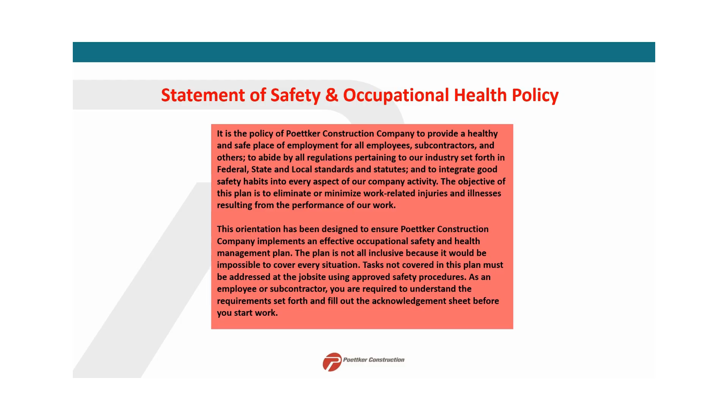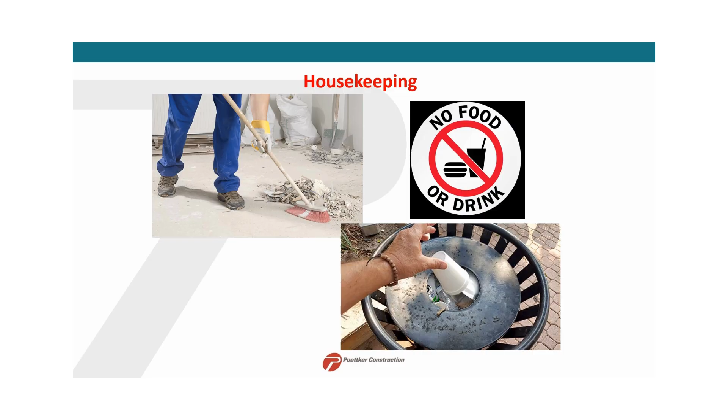Housekeeping. Clean up work areas daily. Place trash and debris in proper receptacles. Having a clean job site can help mitigate slips, trips, and falls. Everyone is responsible for their own cleanup. Food and drink shall only be consumed in designated break areas and trash thrown away properly. Only water is allowed outside of break areas.

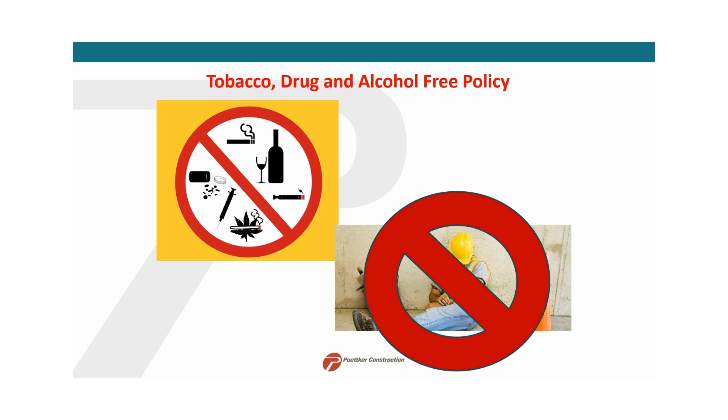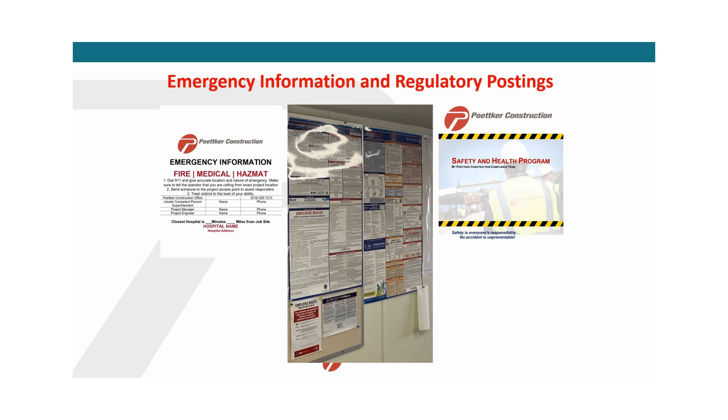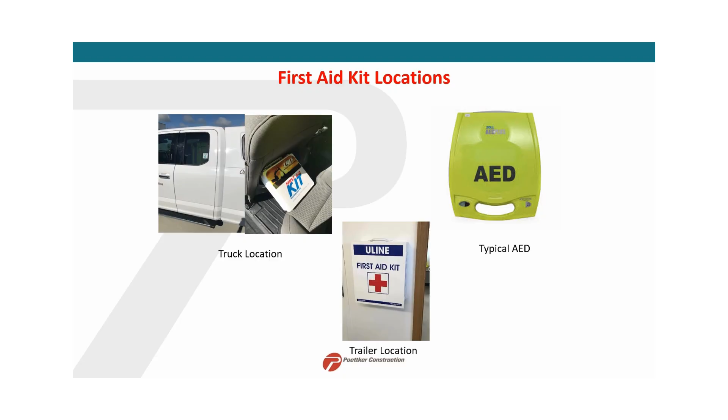First aid kit locations. At the very minimum, a small first aid kit is located in each Poettker Construction truck. Projects with job trailers will have a kit located in the trailer. Given the location of a project, an AED, automated external defibrillator, may be available. Poettker Construction strives to have all their supervisors first aid CPR trained. However, all kits and AEDs have easy to follow instructions when administering help.

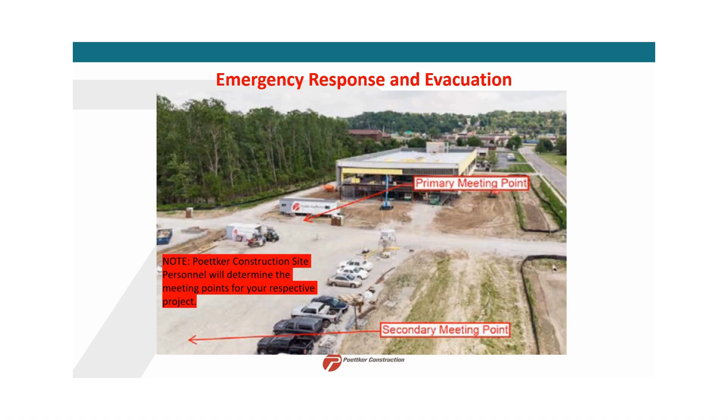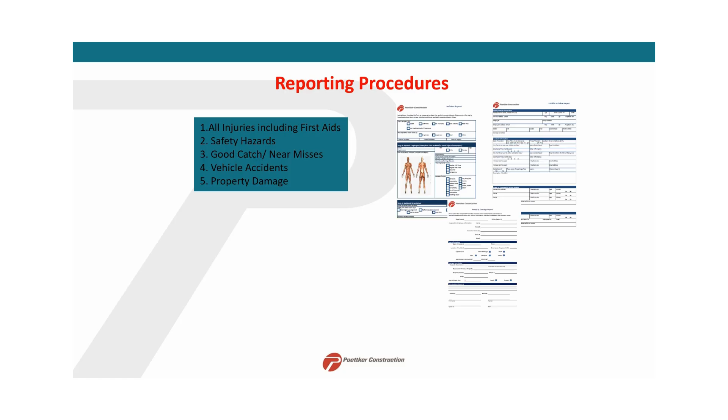Reporting procedures. All injuries including first aids, good catches, near misses, vehicle accidents, and property damage must be reported immediately to your supervisor. This allows us to investigate, identify trends, and determine root cause. It is Poettker Construction's expectation that everyone cooperates with designated investigators when an incident investigation is being conducted.

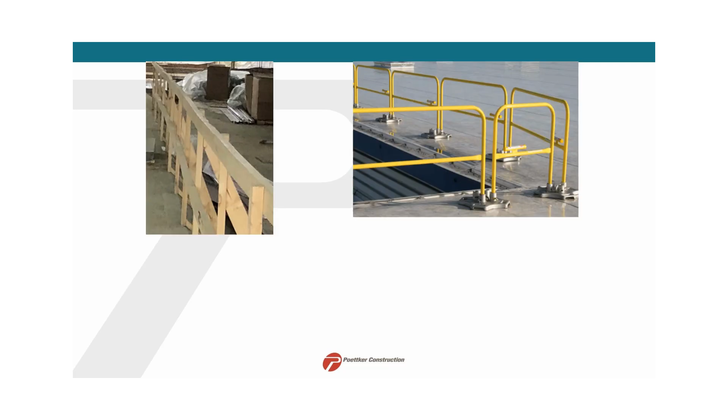When elimination is not possible, guardrails are the most common installation. Guardrails must be installed with the top rail at 42 inches plus or minus 3 inches, rated to withstand 200 pounds of pressure both down and outward. A mid-rail at 21 inches and toe boards installed if there is potential for workers to be struck by falling objects below.

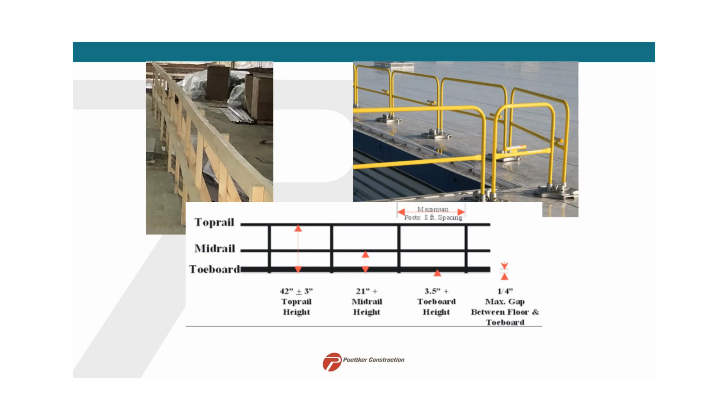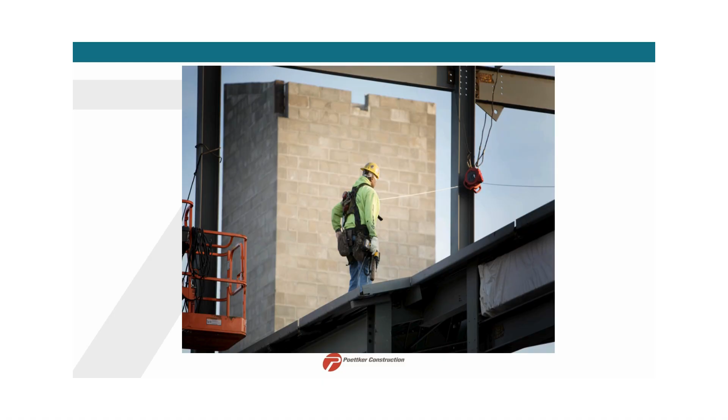The next most common fall prevention control is the use of a personal fall arrest system. These are comprised of a rated anchorage point, connecting device, either a lanyard or self-retracting lanyard, and a full body harness equipped with trauma straps to assist in self-rescue.

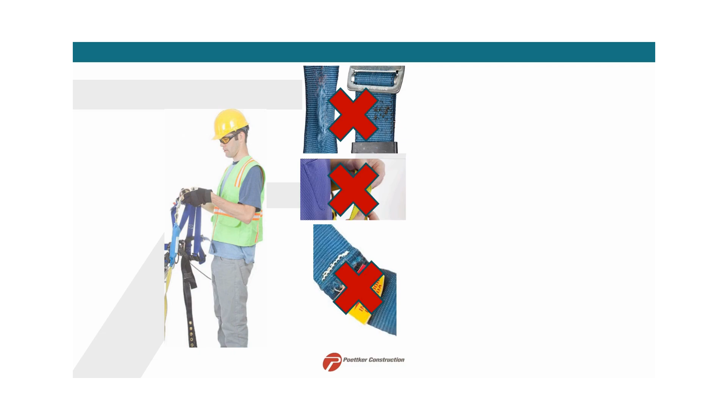Personal fall protection equipment must be inspected before use, and damaged or defective items shall be taken out of service immediately. Fall protection equipment shall also be sized for each employee and worn correctly, used in the application for which it was designed. Employees must be trained on the equipment they are assigned. If you have any questions regarding this policy, please contact your supervisor.

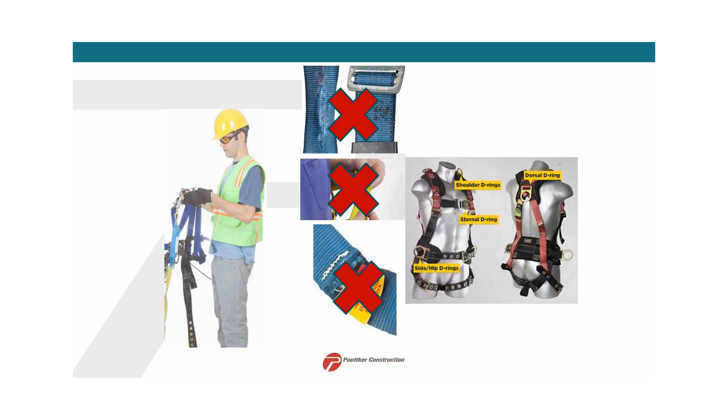Ladders, scaffolds, and lifts.

Ladders must be inspected before use. Look for damaged rungs, missing tags, bent or overflexed arms, cracks, or other damage. If any of these defects are found, the ladder shall be taken out of service immediately.

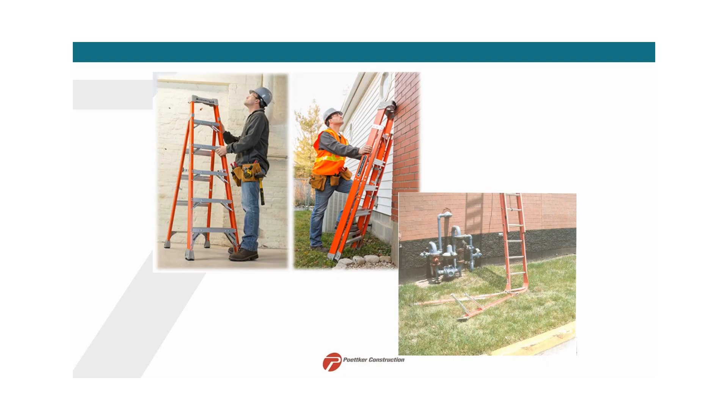Use ladders for their intended use and never lean a step ladder unless it's specifically designed to do so. Maintain 3 points of contact at all times while ascending and descending from the working level. Keep your belt buckle positioned between the rails while on the ladder. Hoist materials using a rope and never carry anything while climbing.

Never stand on the top rung. This could cause you to fall, resulting in injury or death.

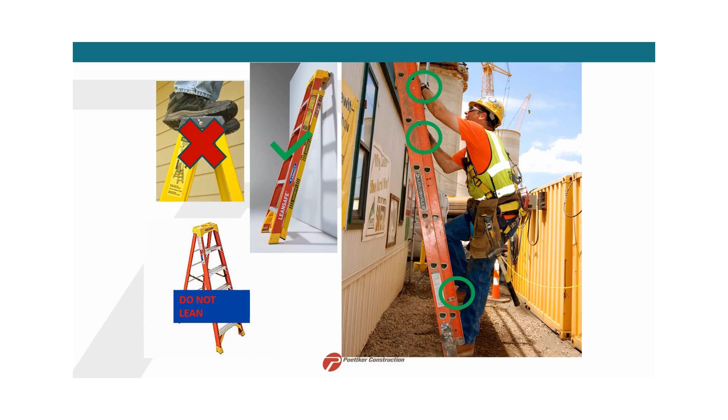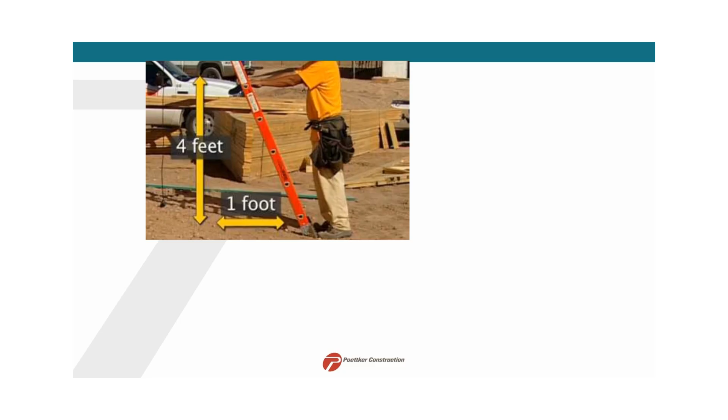Extension ladders shall be installed using a 4-to-1 slope, meaning for every 4 foot in elevation, the base is extended outward 1 foot. Extension ladders must extend 3 foot above the working surface and shall be secured at both the top and bottom.

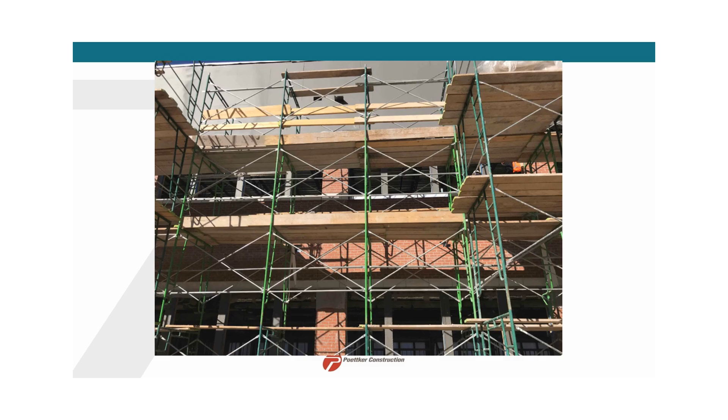Scaffolding must be installed and dismantled under the supervision of a competent person. Scaffolds shall have base plates and mud sills installed, properly sized and of appropriate materials. Working surfaces must be fully planked, and workers will never be permitted to climb on bracing. Designated access points with ladders must be determined.

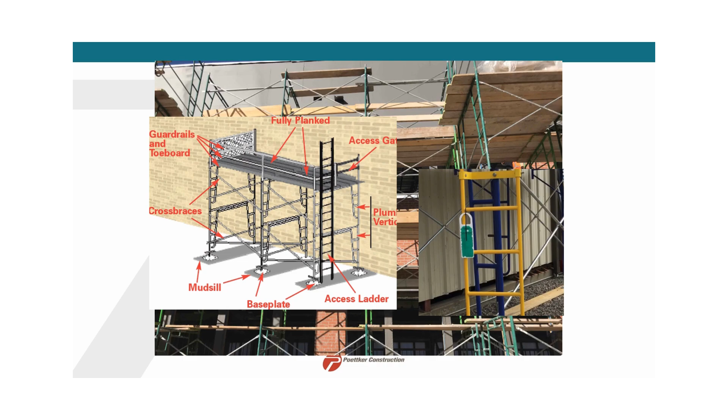Personal fall arrest systems or guardrails shall be utilized anytime scaffolds are over 6 foot in height. In addition, inspections shall be done by the competent person and tagged appropriately prior to anyone accessing the scaffold.

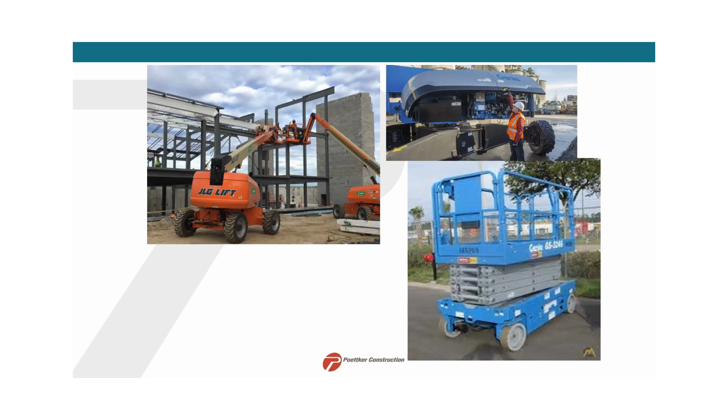Articulating boom lifts and scissor lifts help us get personnel to elevated working areas and are common pieces of equipment on our job sites. Operators must be trained on the equipment they are using. Equipment must be inspected before use, and equipment found inadequate taken out of service immediately. Personal fall protection with appropriately sized SRL or lanyard must be utilized at all times when operating these types of equipment.

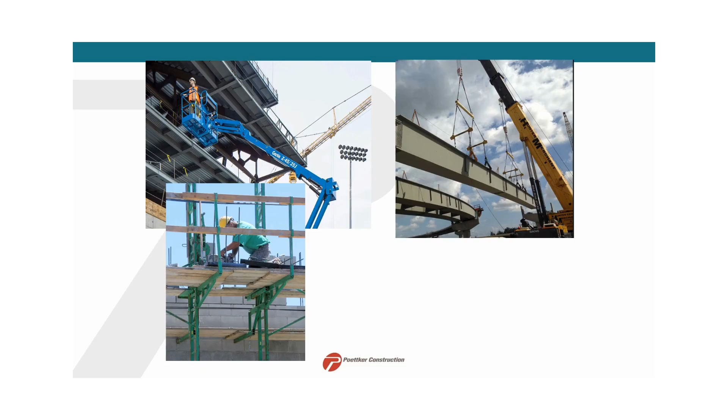Overhead work greatly increases the potential of falling objects striking a person below. Tasks include, but are not limited to, working off man lifts, steel erection, masonry work off scaffolding, and roofing work. We have controls we can put in place to protect those workers down below from being struck by objects.

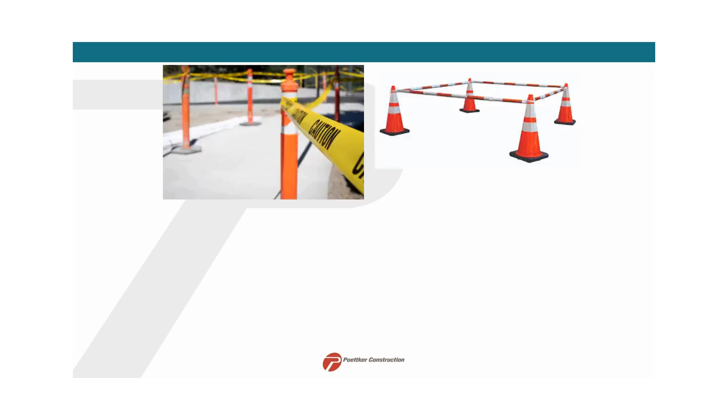These controls include restricting access to the work area. This would include flagging and barricading off the area in question, posting signage warning others of the potential hazards above, tethering tools, equipment, and materials, and utilizing spotters and monitors so that individuals do not inadvertently walk into the area.

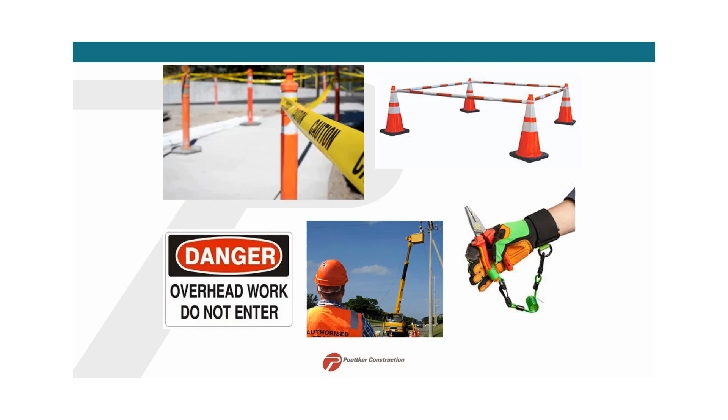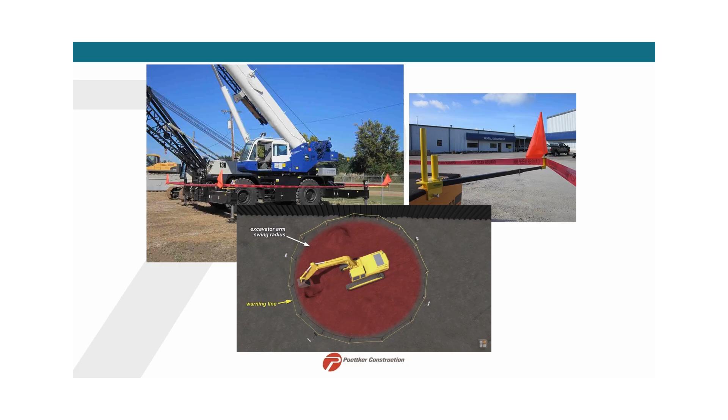At no time is it acceptable for employees to work under suspended loads, regardless if the employee is authorized to be in the work area or not. Swing radiuses for equipment that can pivot on a center pin shall be flagged off or barricaded. Doing this will help eliminate the potential of a struck-by or caught-between incident.

Excavation and trenching.

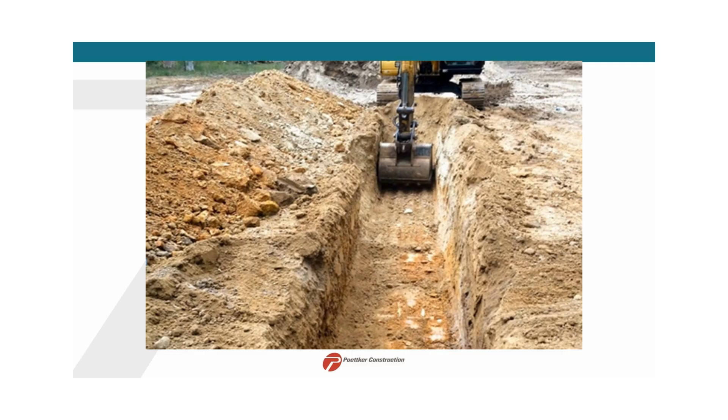Excavation and trenching work shall be done under the direct supervision of a competent person. This person should have an understanding of the work, be able to identify hazards, and provide corrective action.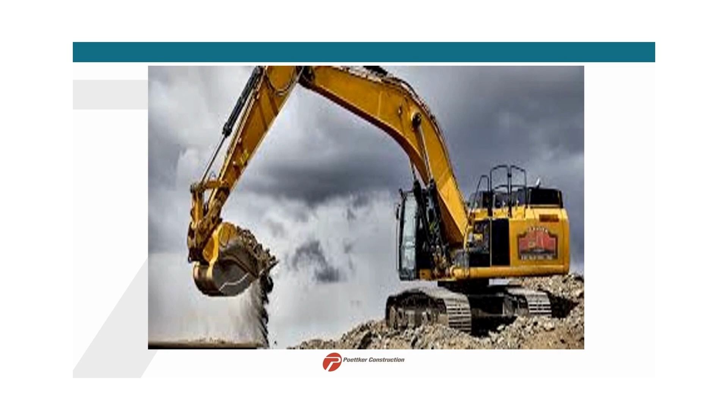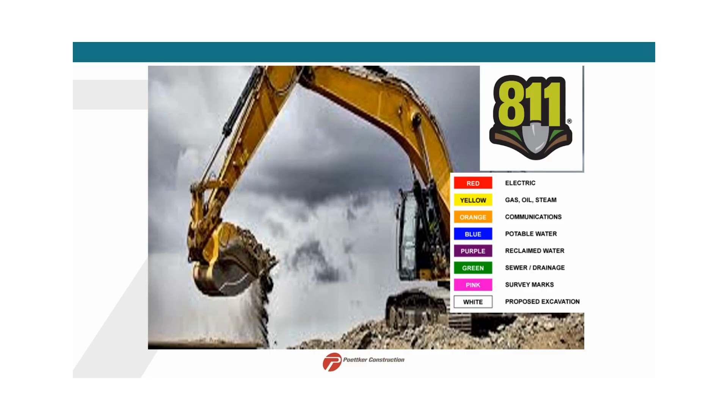Each contractor performing ground penetrating activities shall obtain a dig number by utilizing either 811 or other states' respective one-call systems. The allotted time must be observed for utility companies to complete their locates. Using another contractor's dig number is never allowed and against the law.

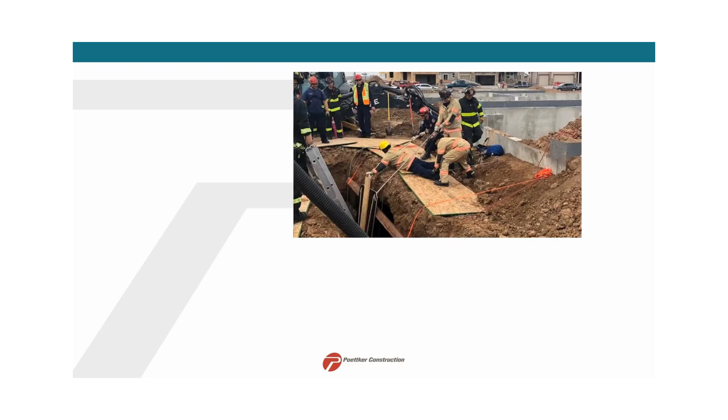Excavations and trenches have the capacity to be some of the most dangerous areas of our job sites. Hazards can range from cave-ins to oxygen-deficient environments. It is important that we take precautions and identify potential hazards before commencing excavating and trenching activities.

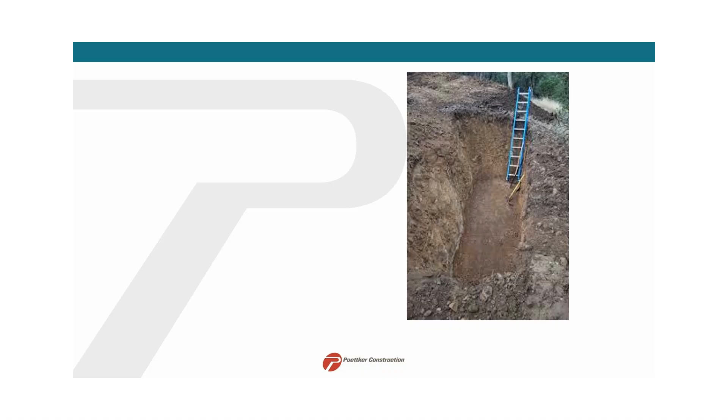All excavations and trenches 4 foot or more in depth require either ladders, stairways, or ramps installed at 50-foot intervals. This is so a person in the trench or excavation never has to travel more than 25 foot to exit the space.

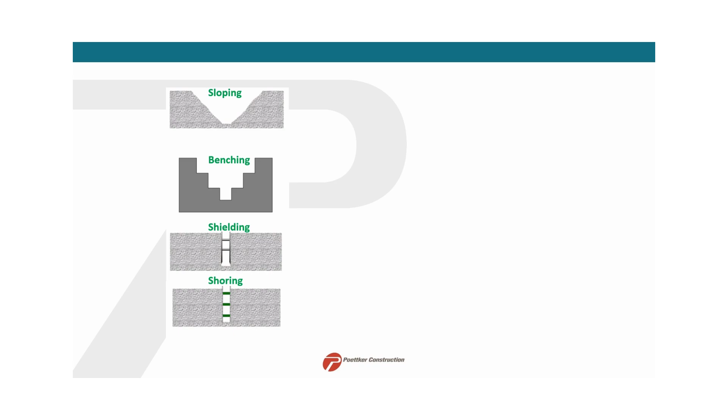All excavations and trenches greater than 5 foot but less than 20 foot will require one of the following: sloping, benching, shielding, or shoring in order to protect workers working within. The competent person must know the soil type in order to make the selection and make the excavation safe.

Confined spaces. Confined spaces are never to be entered unless you are authorized to do so. Confined space entry will require a written plan, testing, and permitting determination prior to the employee's admittance. Please contact your supervisor should your work require confined space entry.

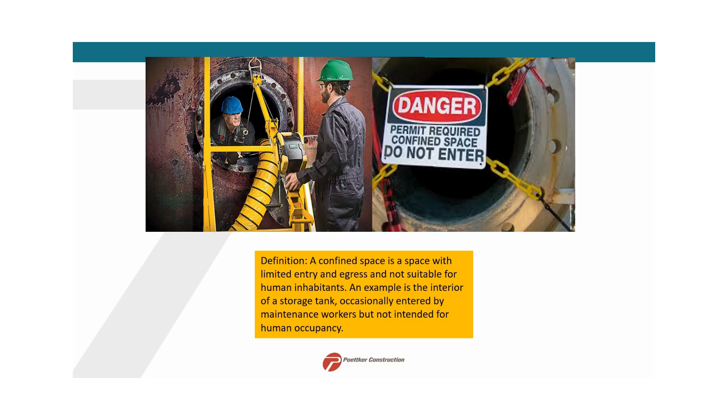Electrical. Only licensed electricians are authorized to work on electrical equipment. When working on or near equipment, power sources shall be de-energized and made safe. Lockout tagout shall also be implemented to protect and avoid accidental energizing of circuits.

At no point in time is an unauthorized worker to enter an electrical room and power back on breakers. If a breaker is flipped off, it could indicate a problem or someone could be on the other end and result in electrocution or shock. If you need assistance, please contact the site electrician.

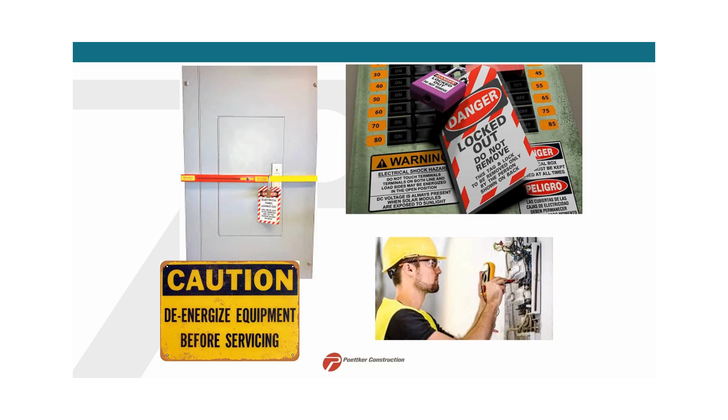We utilize electricity every day on our job sites to complete our work through the use of extension cords, lighting, and power tools.

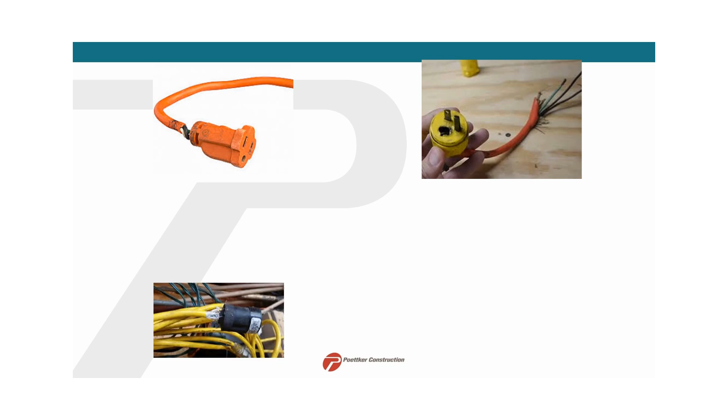Cords shall be inspected and free of damage. Be sure to check the cord fully and pay special attention to the area around the plug. Tape is never an acceptable repair for cords. Cords found to be damaged shall be taken out of service immediately.

Temporary lighting shall also be inspected. A minimum of 5-foot candles shall be provided to each work area. Lighting shall also be on its own dedicated circuit, protective cages closed, and missing or burnt out bulbs replaced.

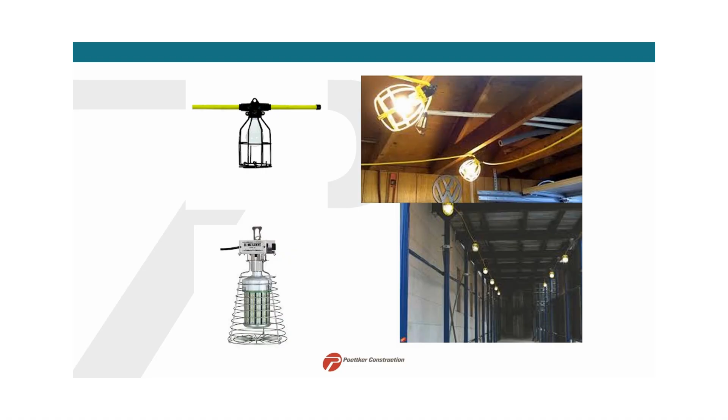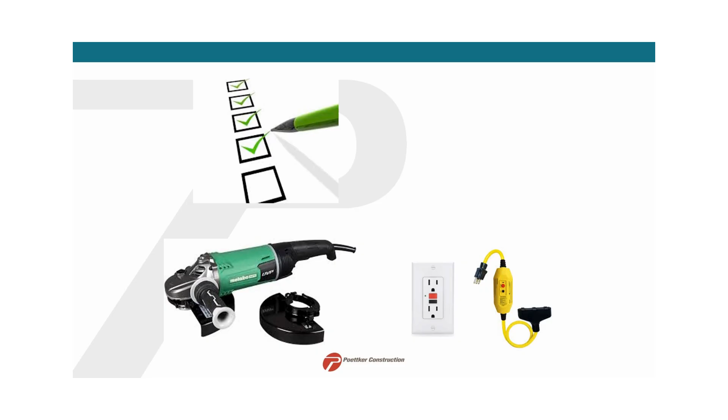Power tools shall be inspected before use. Guards and safety devices shall remain in place. Tools shall always be plugged into an approved GFCI. Cords shall be in good condition and double insulated. Tools shall never be modified unless written consent is obtained from the manufacturer, and tools found to be damaged must be taken out of service immediately.

Overhead utilities. Overhead electrical lines are all around us, and far too often workers and equipment come in contact with these installations. All workers and equipment operating near these lines shall maintain a clearance distance of at least 20 foot for voltages 50 kV and above. Cover-up protection, signage, and elevated warning lines should also be utilized.

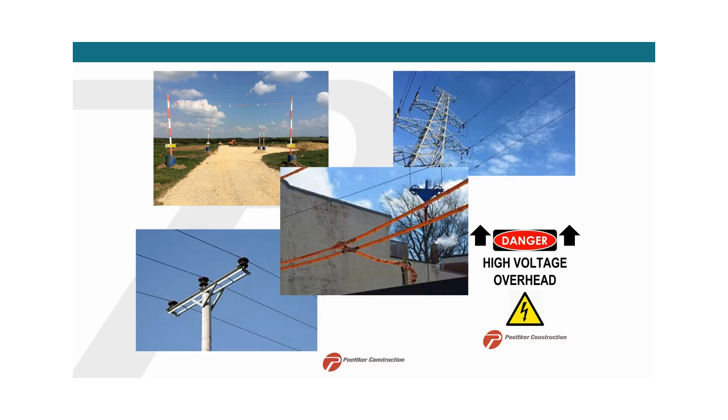Hot work. Hot work is any work that has the potential to produce a spark or open flame. This includes but is not limited to welding, cutting, grinding, brazing, and torching.

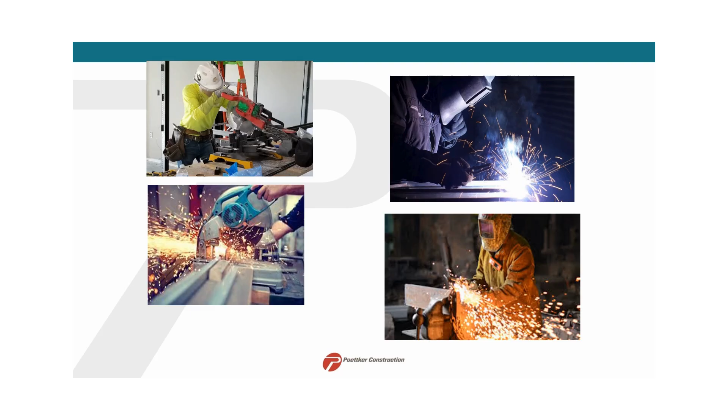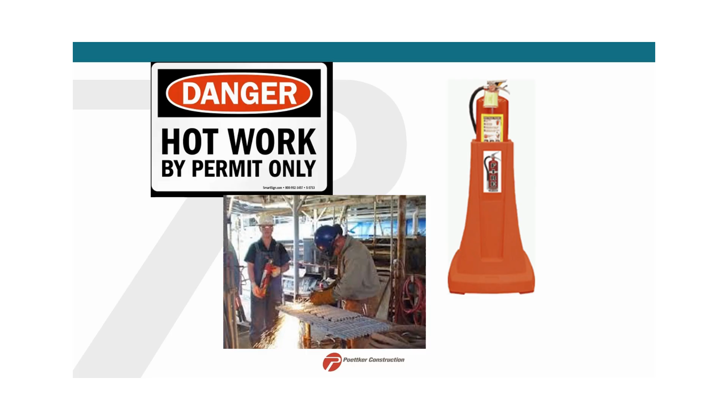Hot work also requires the use of additional personal protective equipment. A welding hood or face shield with safety glasses will be required when performing this work. Permits and fire watch with fire extinguishers must be utilized when performing hot work. Fire extinguishers are available on site and are in the back of every Poettker Construction superintendent truck. Please check with your supervisor on site-specific requirements when performing hot work.

Employee conduct. Workers are expected to conduct themselves in a professional manner at all times. This includes wearing proper attire, exhibiting good hygiene, displaying good behavior, avoiding and not participating in theft, vandalism, fighting, horseplay, aggressive behavior or language, sexual harassment, and discrimination of any protected class.

Any violation of this policy will not be tolerated. Report any concerns to your supervisor so disciplinary action can be taken.

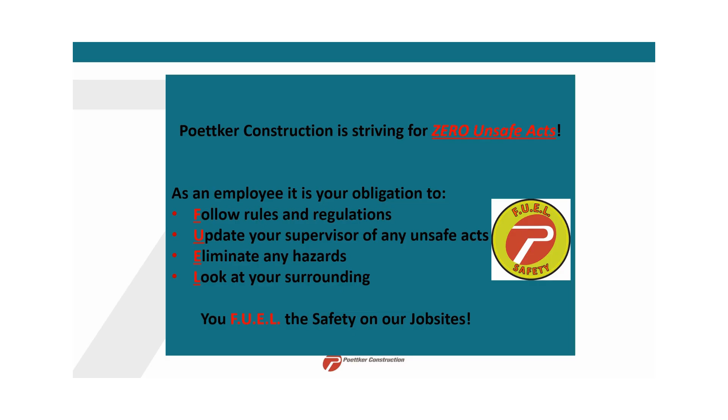Your participation in our safety culture is how Poettker Construction will achieve zero unsafe acts. As a professional on our sites, remember the acronym FUEL: Follow rules and regulations, update your supervisor of any unsafe acts, eliminate any hazards, and look at your surroundings. You fuel the safety on our job sites.

On behalf of Poettker Construction, welcome to the team, and thank you for your dedication to safety. If there are any questions, please ask your Poettker Construction representative or supervisor. Remember, safety is everyone's responsibility. No accident is unpreventable.